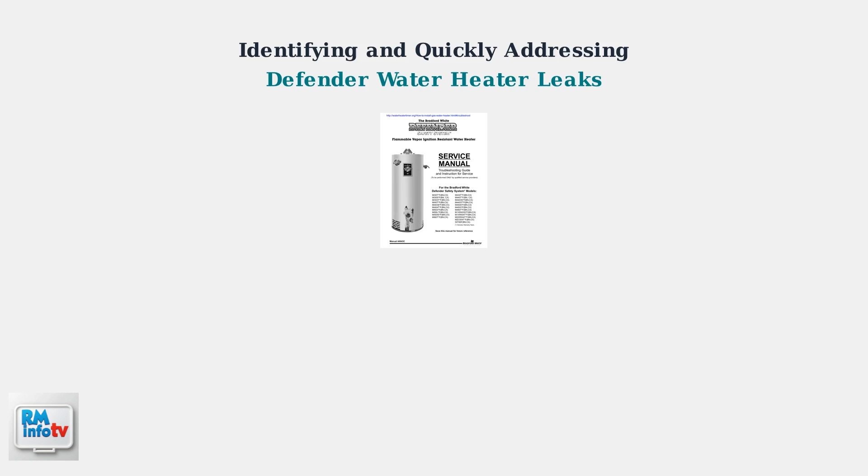When your Defender water heater starts leaking, quick identification and proper response are crucial to prevent water damage and safety hazards. Before attempting any repairs, safety must be your top priority. First, turn off the water supply to prevent further flooding. Next, shut off the power source, whether it's gas or electric. Finally, allow the water to cool completely to avoid scalding injuries.

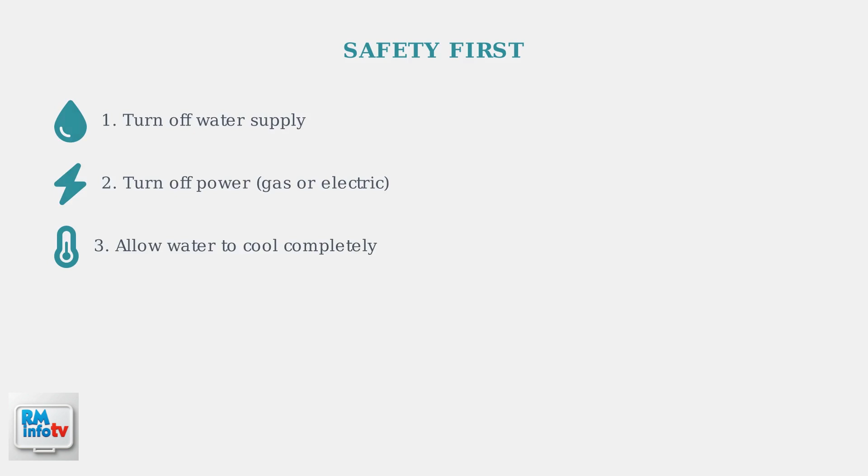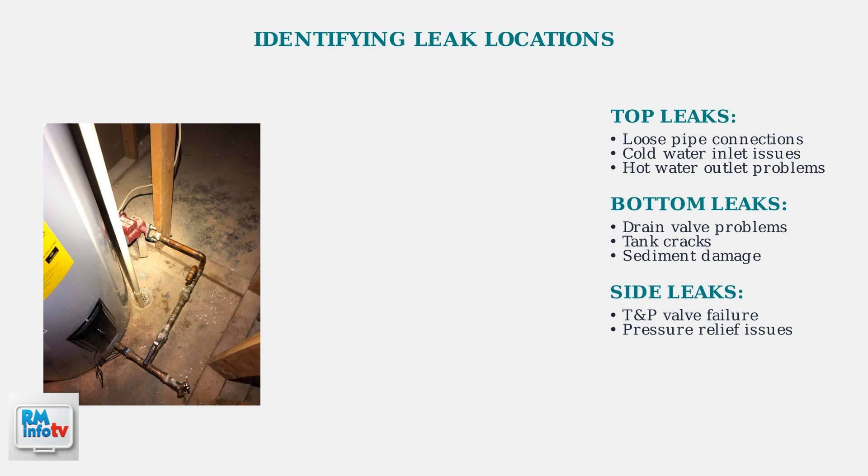Now let's identify where leaks commonly occur. Top leaks often involve loose pipe connections at the cold water inlet or hot water outlet. Bottom leaks typically indicate drain valve problems or tank cracks. Side leaks usually point to a faulty temperature and pressure relief valve.

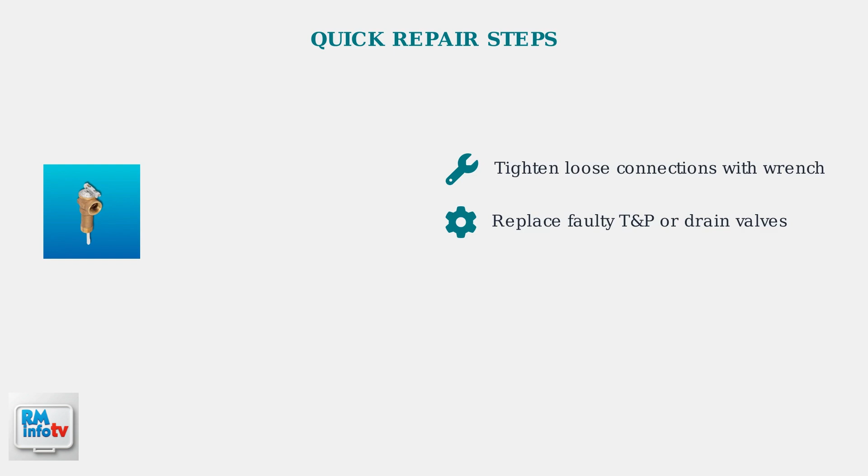For quick repairs, start by tightening any loose connections you find using a wrench. If the temperature and pressure relief valve or drain valve is corroded or leaking, you'll need to replace it after draining the tank. For small tank cracks, epoxy can offer a temporary fix, but tank replacement is generally recommended for a permanent solution.

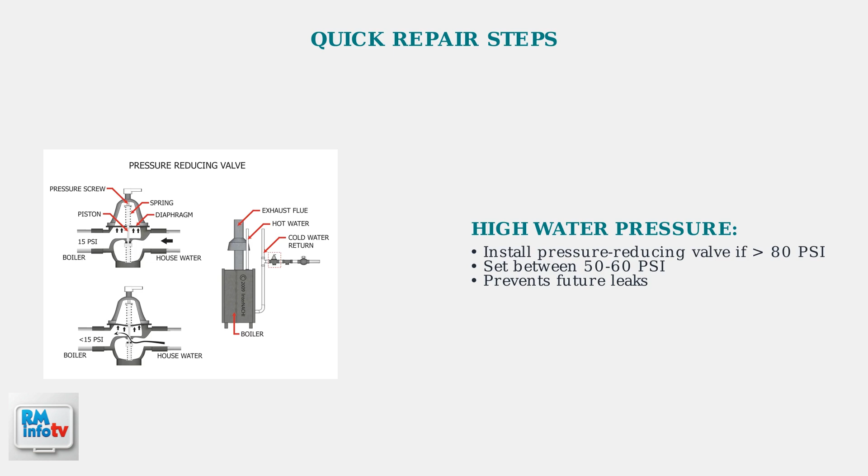If your home's water pressure exceeds 80 psi, consider installing a pressure-reducing valve set between 50 and 60 psi to prevent future issues. Call a professional plumber if you're uncomfortable working with gas or electrical connections, if the leak is severe or you can't locate the source, if you suspect tank damage, or if your water heater is over 10 years old with frequent problems.

Prevention is the key to extending your Defender water heater's life and avoiding costly repairs. Regular maintenance can prevent most leaks before they start. Schedule annual or biannual maintenance with a qualified plumber. Regular professional inspections can catch problems early and extend your water heater's lifespan significantly.

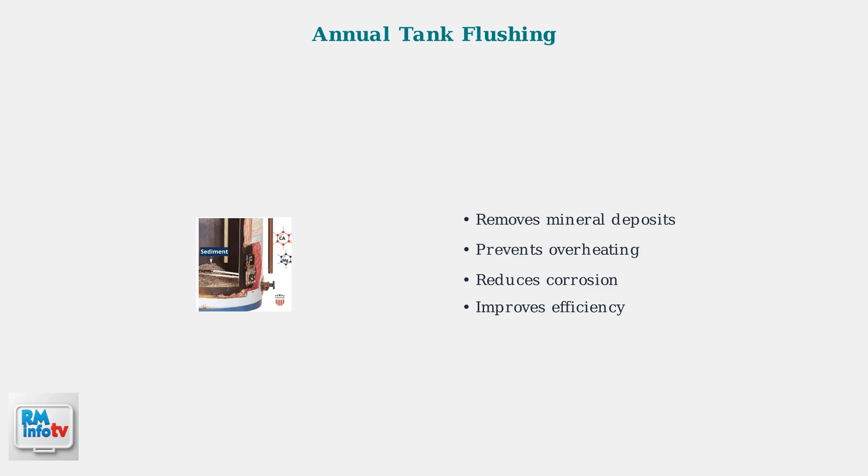Flush your tank annually to remove sediment buildup. Mineral deposits accumulate at the bottom of the tank, causing overheating, corrosion, and reduced efficiency. Inspect the anode rod every few years and replace it if corroded. This sacrificial rod protects your tank from corrosion by attracting corrosive elements in the water.

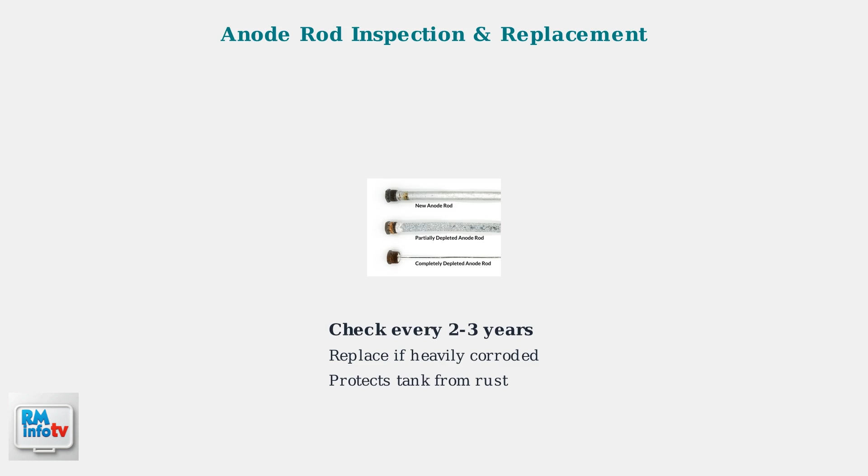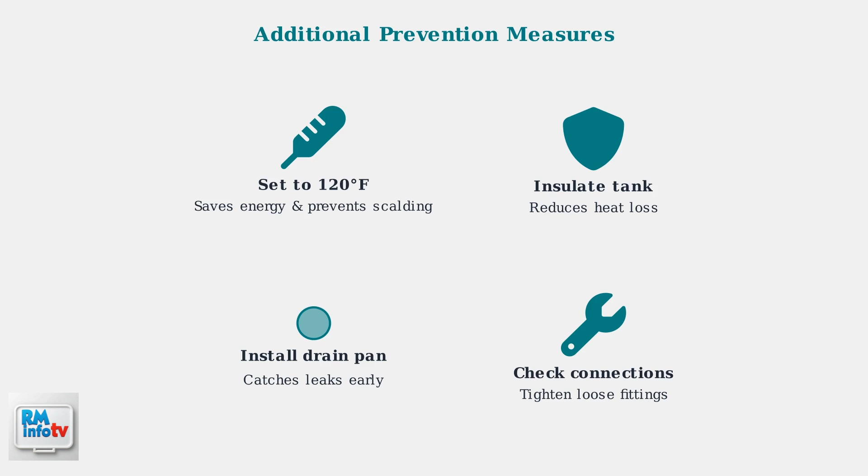Additional prevention measures include setting your thermostat to 120 degrees Fahrenheit, insulating the tank and pipes, installing a drain pan, and regularly checking all connections for wear. Water heaters typically last 8 to 12 years for gas units or 10 to 15 years for electric units. Consider replacement if you notice rust in the water, inconsistent hot water, or strange noises from the tank.